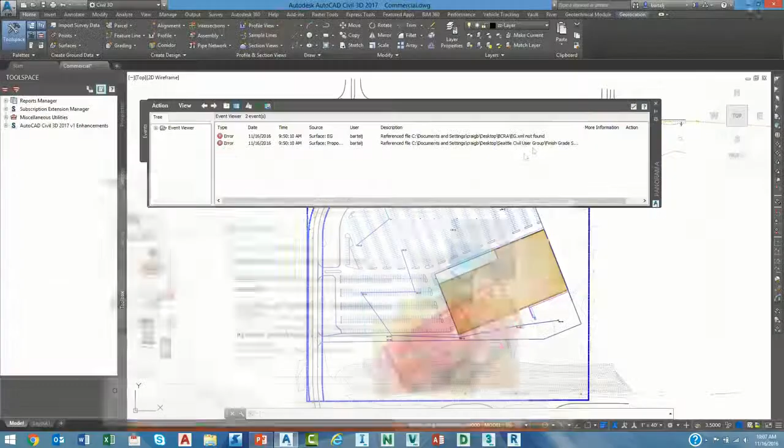I'm going to drop out of my PowerPoint here, and I'm in Civil 3D right now. The other point I'd bring up is that the bulk of the things we're showing are Civil 3D related, and they're not necessarily specific to 2017. So if you're on 2015, 16, 17, even if you're on 14, maybe even 2009, some of these things will still work as well.

If that situation were to change, we'll be sure to point that out. Now, in Civil 3D, we have a lot of tools to generate sheets, plan and profile cross-section sheets. There are times we might have a project like this where we'd like to tile it up into pieces such that we can do a grading plan sheet, tiling it up more in a grid pattern. It's not necessarily obvious, but that functionality does exist in Civil 3D.

We leverage a tool within Civil 3D called a map book. The way I'm going to do that, we'll open up a template so you can see that. So we'll open up my DWT, and I'm going to drill down into my folder here for grading sheets, and this is my template, just a standard sheet.

I've got a couple of viewports in here already, just so there's no magic involved. I'll take those out. I've got a primary viewport, and I've got another one here that'll reference as a key map, something that's going to show me where I am in the context of the entire project.

If we're in Civil 3D, we assign properties to a viewport called like section or profile. Because this is a different tool, we'll do it a little bit different. I'm going to bring up my map workspace - actually, a little icon up here on the top that'll let me do that quickly.

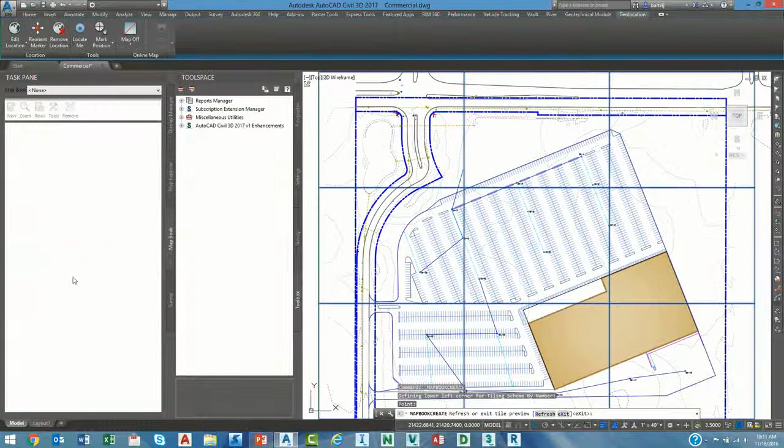I'd like my grading plan sheets to be 20 scale. We'll come down next to how we're going to lay them out. I'm going to pick the lower left corner - we'll start laying out sheets from right there. I don't want any overlap on the sheets, so I'm going to set that to 0. We'll start with 3 rows, 3 columns. I'm going to preview my tiles, and it automatically shows me how that's breaking it out.

I'm going to roll my wheel to back up a little bit. If we do that, I can still refresh my display. I can see I'm not currently getting everything, so we'll come back and we'll set that maybe to 3 by 4.

From there, we'll come down. I can name these sheets. We'll just start with 1 in the upper left corner, and number as we go through.

The last thing I'm going to do is define my key map, that area in the corner where I can see myself in context. I've got some layers within my drawing that outline the property, the building, things I would want to see in the key map. I'll select those layers, and those will be the only things that display in that viewport.

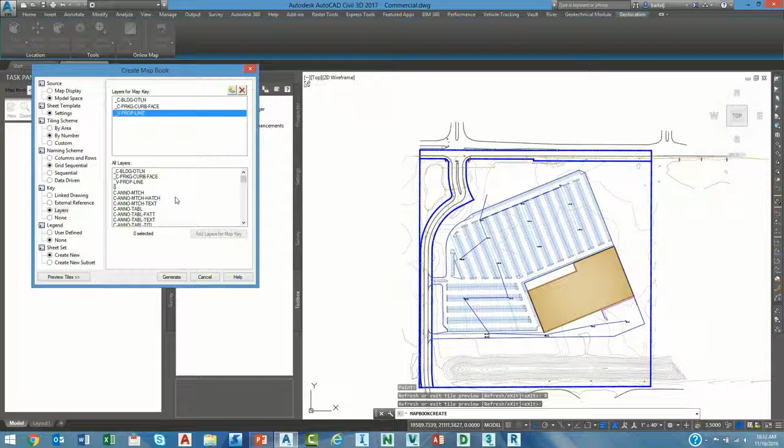And we'll go ahead and generate the map. Since I don't already have a sheet set, now we'll go ahead and create it. We'll throw that on my desktop for right now.

There are my sheets. If we come down to the bottom and I now click on grading, there's grading sheet number 1, number 2, number 3. You'll notice as I advance from sheet to sheet, it's maintaining where I am in the project, and I'm able to go from there.

So very quickly, I'm able to take a process that I would have done probably manually without a tool like this and break them out automatically. Okay, let's shift gears and look at the next item here.

Next thing I want to look at, we'll come down for my projects. We're going to look at associating files.

There are times when I have geometry in my model, maybe within my DWG file, that has information. I may have additional information about those objects someplace else, maybe in a database. The easiest way to think about this is with parcels, but it could be information collected in the field, blocks, trees, or a number of different things. The example I'm going to use here will go with parcels.

Parcels have a parcel index number as far as what number the parcel is. From there, you could go look at a table and pull up all the information about that parcel. Like I said, a lot of the time these things live in different places. I'd like to look at a way that I can bring those together.

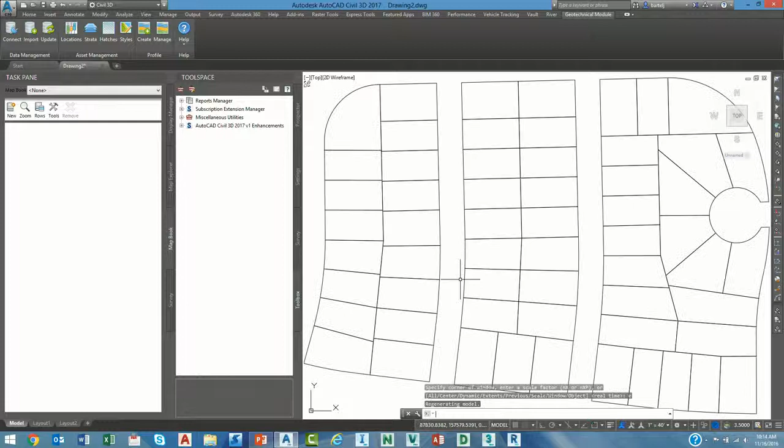We'll say okay, it inserted 59 of them. If we zoom extents, there's our information converted into just DWG polyline type entities. If I highlight this and go to properties, we see that there is the parcel index number, the attribute that was brought in. Now I'm starting to chew up a lot of real estate with these tools.

A couple things: with the tools, like on properties, I've already got set to auto hide to free up some real estate. I'm going to do that with my task pane as well. We'll set that to auto hide, and those now appear on the side.

If you're really tight for space, one other thing we can do is right click on this and convert all of those to icons only. If I convert them to icons now, I can just hover over the thing and I'd have all the tools down the side. So if you're not fortunate enough to have multiple monitors, I've seen 2, 3, 4, whatever. If you're dealing with one, it's a quick way that we can organize those.

So I've got that available to me. Let's go ahead, I'm going to bring out my task pane here. Many things in Civil 3D are drag and drop.

Now I said I've got maybe information someplace else, in a database, that has that parcel index number with additional information. Let's drill down and take a look at that. We'll go into my project. I've got my database, it's a Microsoft Access database.

I'm going to drag that in, drop it in my tool space, and it automatically attaches it for me. I'm going to go ahead and highlight that. And if we say View Table, here's all the information that I have. One of which is the parcel index number. So now I've got the data and I've got the geometry. I just need to find a way to hook the two together.

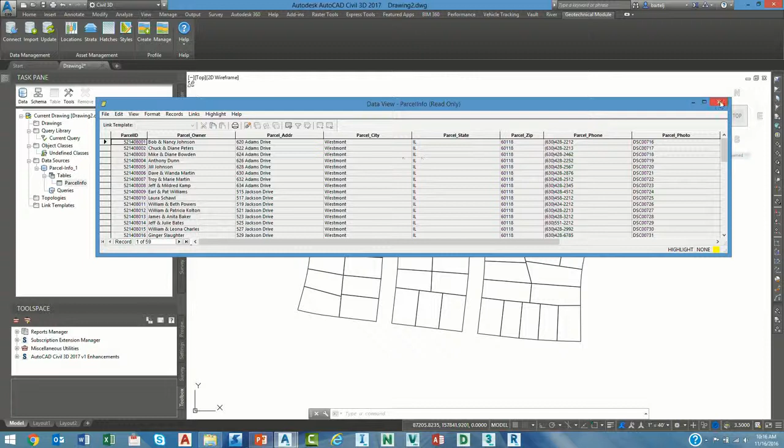The way that we'll do it, we create what's called a link template. I'm going to right click on that and we'll define it. It's actually pretty simple. We'll just tell it the two things we're going to do. I'm going to take the table. I'm going to build a new link template. We'll call it AU 2016. And we'll tie that to my key, which is my parcel index number. I've now got a hook into the database. I now need to hook it to my geometry, and I'll be able to go back and forth.

So with the link template, we'll say that we're going to generate the links. We have a number of ways that we can do this. We can link to blocks that have attributes. The attribute would be what we would tie into the table. We have text would be what we tie into the table. We could have an enclosed block, a block with a line around the outside of it, a polygon. It would do it to that or an enclosed text.

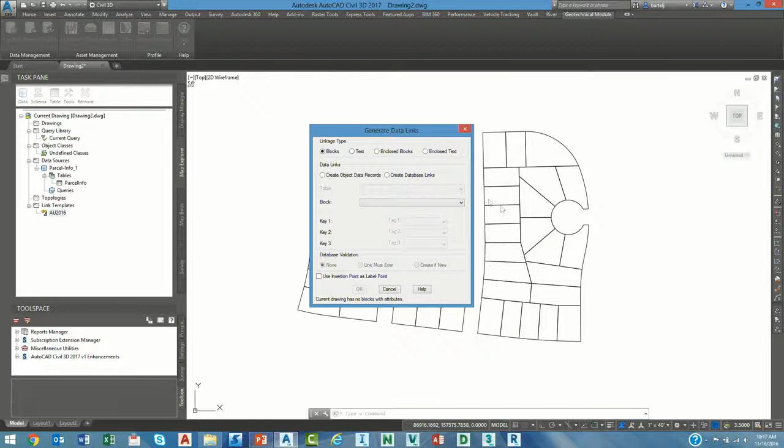Well, I've got geometry I want to tie it to. I don't have blocks or text to work with, so let's go ahead and create something. I brought this in and this attribute exists within my file. So I'd like to create what's called map annotation, which is a kind of block. I'm going to bring up my map tool space here. We're going to go to annotate, and I'm going to say define template. We'll give this a new template name. We'll just call it parcel index for my parcel index number.

I'm brought into an area now where I would build a block. What I need is a block that's going to read something from an attribute. And I really wish that they gave us that option here in the ribbon, but they did not. So it's kind of the super secret thing. How do you know? You just have to know. So the command that we're going to put in is MAPANNTEXT. I heard somebody say it, so somebody's been with me on that.

Select annotation, we'll press enter to enter the new annotation. The tag that we're going to use, we'll call it just pin. The value that we're going to tie that to, we're going to go out to my object data. We're going to drill down and we're going to grab the value that we pulled in from the shapefile. We'll say okay. What text font do we want? How tall do we want it to be? We'll say 5. Justification, we'll say that it's middle center. That's good. We'll say OK.

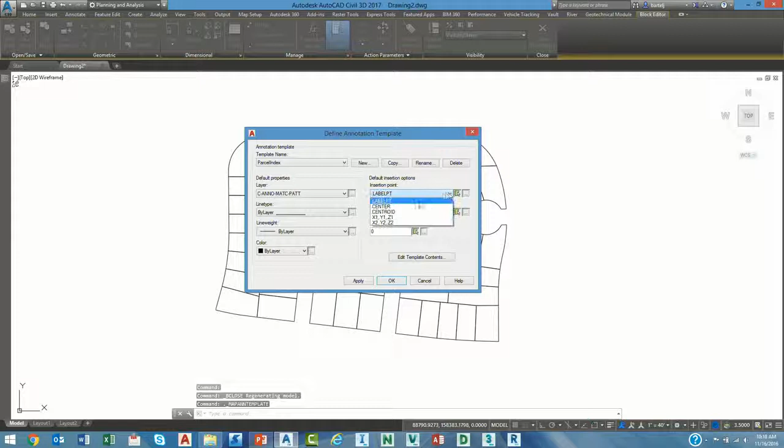I'm going to put that on the screen at 0, 0. And we'll zoom extents. There is my annotation, or my custom block now. We'll close the block editor. Save my changes. Notice it gives it a really cool name on the front of it, too. So we'll say Save Changes. When it gets placed in my objects, I can give it some additional information. By default, it should be placed at the centroid. Find the middle of that object and put it there. I can also alter the scale, maybe the layer, some other things like that.

We'll say OK. With that built, we'll come up and we'll say Insert. What would you like to insert? Well, we'll do the parcel numbers. What would I like to insert them on? We'll attach our objects. When I right-click, it's now read all the attribute values and it's placed it on the geometry. I've now created blocks inside my line work.

We'll do one last thing. The cool thing about this type of annotation is it's tied back to the attributes. So if we come back to properties and I were to change this to a 0, and we'll hit enter. It didn't update this guy, but there is a tool right here that I can say refresh the annotation. Parcel index, we'll say OK, and we'll do full annotation, and the values update.

All right, gives us a great way that I can either go to a database table or I can go to just attributes within the file, update my annotation. All right, now to make the link and wrap this guy up, I said I had to have enclosed blocks. Unfortunately, these are custom map blocks, so the tool's not going to allow me to do that just like a regular block.

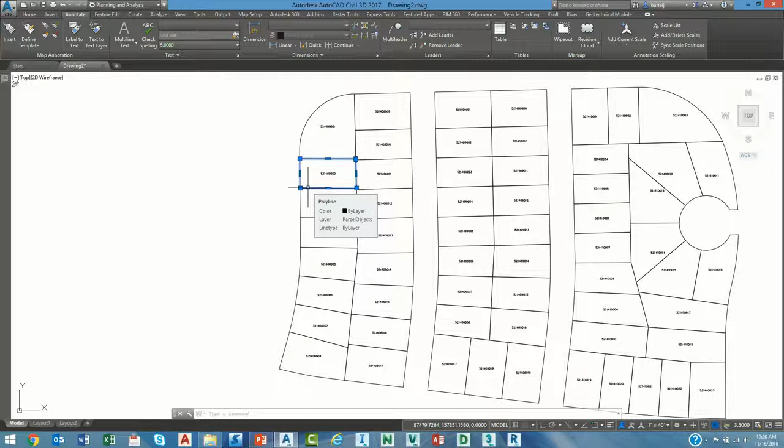So what I'm going to do is I need to turn these into text. All right? Turn them into text. I'm going to use a command called burst. What burst will allow me to do is explode my blocks that have attributes but maintain the attribute values. It doesn't convert them all to tags. So we'll say burst. Objects, I'm going to type in all. Grabs everybody. We hit enter. They've exploded them. Now they're individual pieces of text.

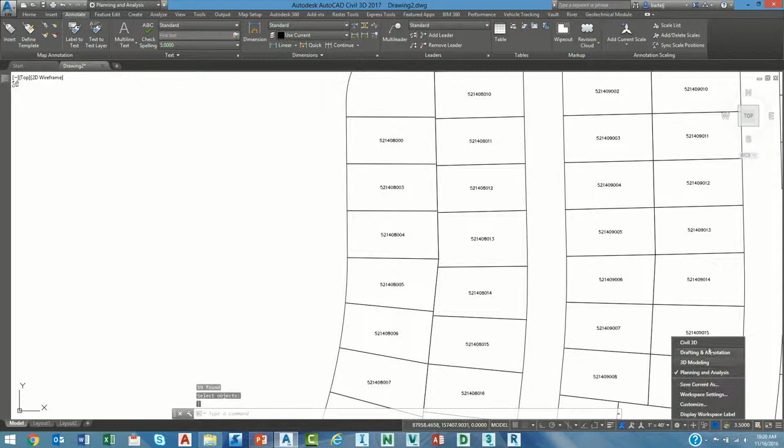All right? Let's do my linkage here. I'm going to flip back to my Civil 3D workspace. We're going to come back up. I've closed my tool space here. We'll bring this guy back up. And we're going to say generate links. We're going to say enclosed text. All right, it already knows the hook into the database table. It knows that it's going to look for text in my file. It's going to fan out from around that till it finds the line work, and I'm ready to go.

So we'll say create database links, and OK. Objects, we'll say all. It's made 59 links. How do we know that it worked? If I bring up my parcel index information now and I view the table, I'll toggle some values to auto highlight, auto zoom, and select. And now, when I pick in my database, I've successfully tied that to information within my file.

All right? Now, last thing that we're going to do to look at this is cool. I've got information in this database. It's an external database. Other people could be modifying it as well. I've got some cool stuff in here with respect to like a photo for that particular object, or a legal description, or any other information I'd like to tie in the database. No reason to have it all tied up in the DWG file if I can reference it from someplace else. A lot of people have wanted to select objects within a file and see a photograph of the head wall or something that was created in the field, or the tree, or the specific culvert.

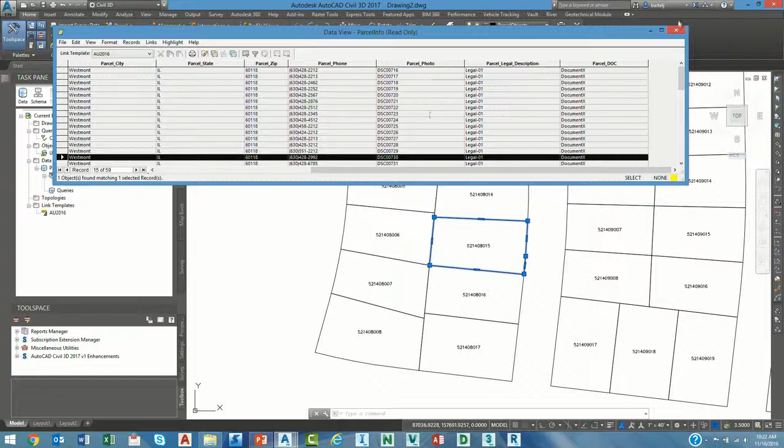Let's do this. Two commands to do that. I'm going to say ADE, def for define, and doc view. We'll just give it a name. We'll call it photo. I'm going to drill down expression. Where does that information live? Well, if I go to my link template and I go down, there is the value that's in the database for the photo. Directory. Browse, where do I have those guys? I've got those guys in my GIS folder. Oops. I've got those in my photos folder. We'll say OK. They've got a JPG extension.

And then all I need to do is tell my system what file I'd like to view that with. So I'm going to go to Internet Explorer. I'm going to right-click on that. I'm going to go to Properties, and I'm just going to copy that target. That's the program I want to use. That's how it finds it, so that's how I want my Civil 3D to find it. So I'm going to paste that in here. I'll add that to my list, and I'm ready to go.

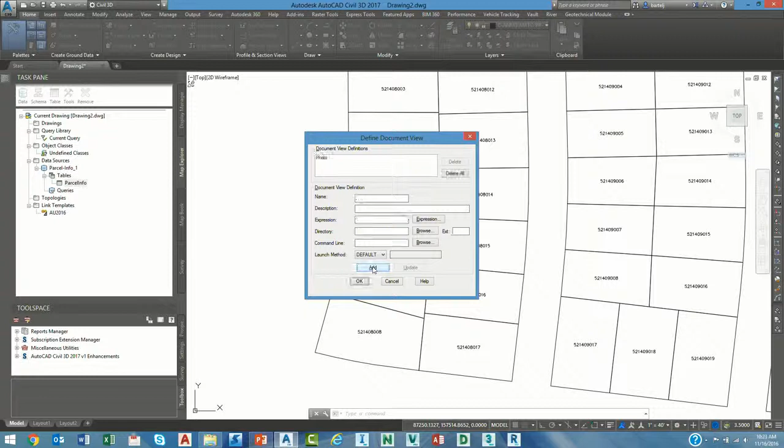All right, to make it work, I want to see the photo. I'm going to type in ADE doc view, select object. I touch this guy, that's what that guy's house looks like. We'll right click, doc view, touch that, that's what that one looks like. If I define multiple ones, I would get a whole list of things I'd like to pull. Like I said, the great thing about this is instead of embedding everything in the drawing, I can reference it from someplace else. Other people can edit it. If they make changes to the database, I have access to it here. All right?

Okay. Let's shift gears. Next thing I want to take a look at. When we're in a drawing file, there's a lot of information we'd maybe like to have access to when we're outside the drawing file. So for example, if we come back into this guy, I'm going to go to Drawing Properties, and I'm going to open up my earthwork file here.

All right. Some people have seen this, some may not. It was actually kind of new to me when I saw it the other day. The quick way to generate earthwork, you know, we've got the volume dashboard and all that now. We can access what I think was the old-fashioned way of doing it.

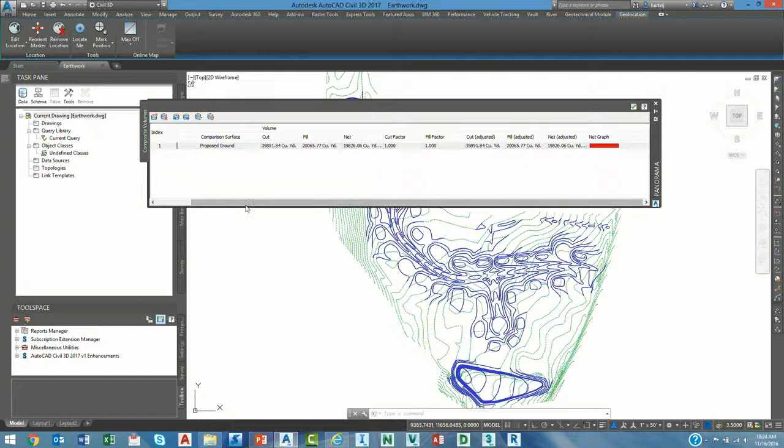If we type in report, surface volume, all right, I just tell it that I want my existing compared to proposed, and I'm done. I've got my earthwork. I don't need to go any further than that. So if I need something quick, I can do it that way. All right, because it's a file that I can do earthwork, I thought I'd throw that in.

The information I want to get access to. If we come down and look at drawing utilities, there's an option for drawing properties. If we go into properties, I can come down to custom, and I can assign values that will live with the file. The cool thing about these values is I can start to put things in it like projection, or the client name, or the project number.

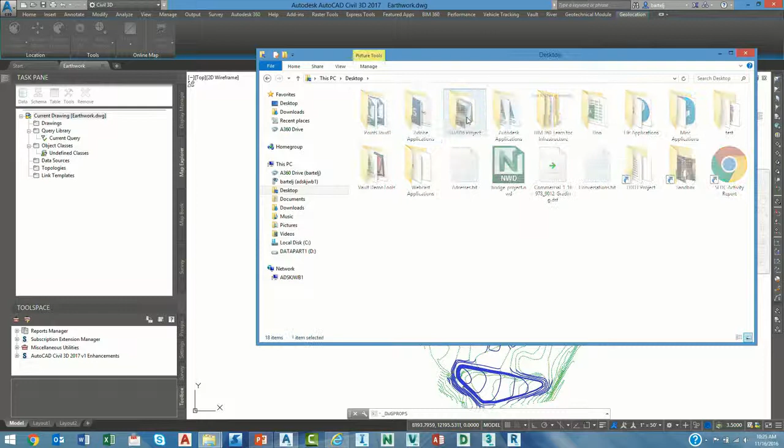All right, and the great part about it is if I navigate out into my Windows Explorer, and we go grab a file, we'll take a look at properties just by highlighting it, look at custom, all right, and I would be able to see those from the outside. So anybody that's ever wondered, well, what's the projection on this file? What's the project name, project number? Now I can just highlight the file, I can right click, and I can see it.

All right, I can't change it from the outside, but I have the ability that I can see it, which is nice. So how we would take and create it, I'm going to say add. We'll say project number. I can give it a value. We'll say OK, and I'll start adding that to the list.

All right. Now that's good for this file, but how would I add that to a bunch of files? And I don't want somebody to have to keep reinventing the wheel. There's a command that will allow us to do that. That's called PROPULATE. P-R-O-P-ulate. So let's take a quick look at this. We'll say propulate.

I can attach a template, I can edit a template, I can list what's there, I can remove it. Let's take and set an active template. I've got one in my folder already that maybe is the default for this project. We'll go ahead and say open. I'm going to use that now that it's attached to update what's in my file. We'll update either the current drawing or other files.

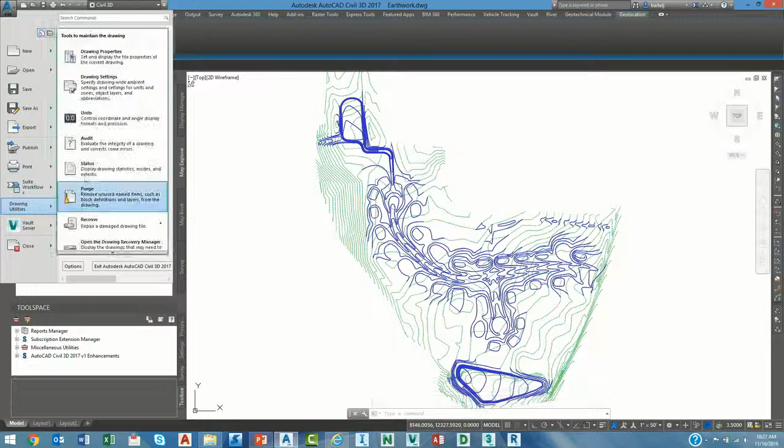If I look at the current drawing, now if I come down and look at drawing utilities, and we look at properties, and we look at custom, I've got all the values ready to go that people can start filling those out. So I can have a template set up for a particular project, and then, like I said, if people want to drill in, they're able to find that. If I'd like to create other ones, that same command, I could open it up, save it for another project, and then go from there.

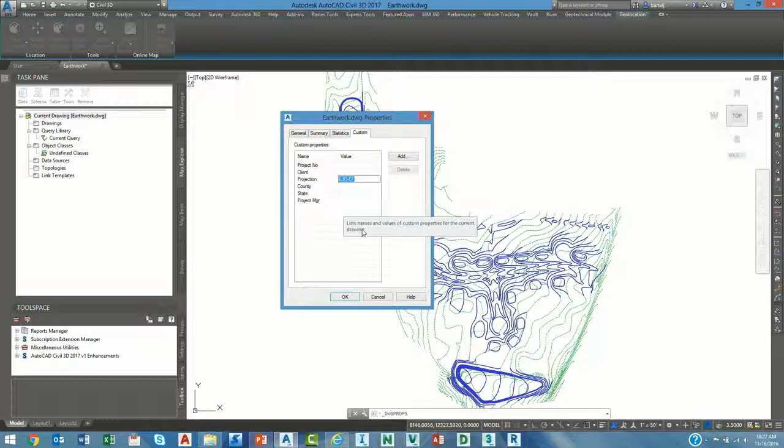All right? Last thing that I would show, I would really like to be able to search on these values, but I can't. It's metadata for the drawing, but the custom things we can't search for, but I can search for other values. So for example, this projection, I'm going to copy that to my clipboard. I'm going to come back and look at summary, and I'm going to put that in here for keywords. And we'll say OK. And I'm going to go ahead and close this file.

All right? So now I've got one file that has Illinois State Plane, East Zone, whatever value I put in for those keywords. The way that I would find that, if I get in the habit of putting keywords into those areas, I'm going to launch Design Center. Anybody use Design Center? All right. So I'm going to type ADC to get into Design Center. There is a tool here at the top for search.

And what I can do is I can come down and I want to search for IL asterisk. And like I said, it would be great if they had the custom stuff at the bottom, but we don't. But I do have the other ones. We'll say keywords.

I'll tell it the folder that I'm going to go to, which is where I've got my 2016 files. We'll say search now. It goes through and searches for all of that information, and it finds my earthwork drawing. All right? So if you get in the habit, the custom, mode of operation in your office to add values to these things, then you can search and find all the stuff that has to do with a particular client, all the stuff that has a particular projection.

If we select a file, we can use drawing properties to access other information. So the cool thing is we don't need to get into the file to actually be able to see it. All right. We're going to shift gears. Let's go into the next one here. We'll say open. I want to look at a site data table.

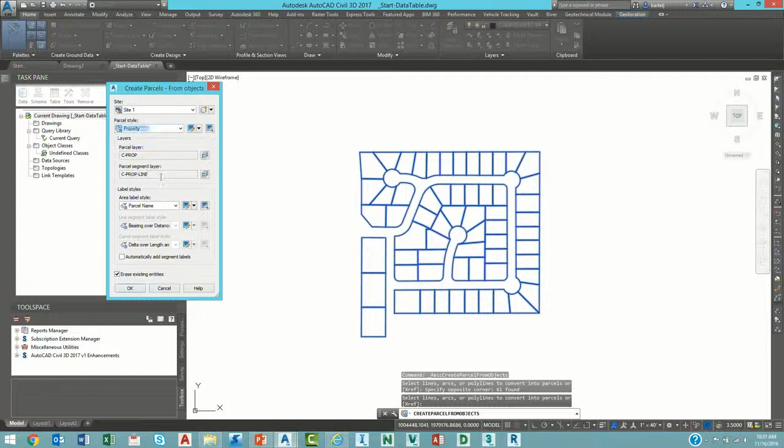I'm going to turn these into Civil 3D parcels. I probably want to clean it up, but for right now, I just want some parcels to work with. So we'll just create parcels from objects. I'm going to window these guys. We'll right-click. I'm going to put them on the site, and I'm going to associate a parcel style. The style is the key that will use the intelligence within Excel to put these things into different categories and make a more intelligent table. So I'm going to call these single family. We'll erase the existing entities, and I've got all my single family lots.

Now, I would do the same thing and define parcels for things like open space, detention area, the overall property. Because I don't have that in here right now, we'll just make a couple things to work with. Let's say this was the overarching property for everything that's there. We'll make another rectangle. Maybe this area is going to be my open space. I'll make one more that's going to be my detention area. I'm just going with rough things now to have parcels to work with.

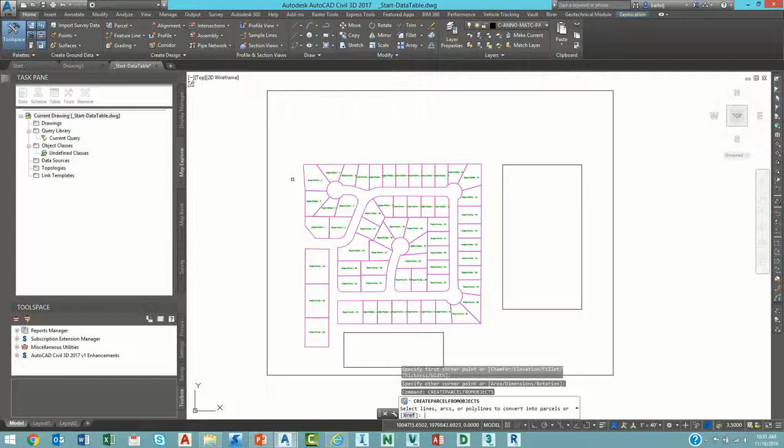Let's define these. I'm going to hit the up arrow to go back to my create parcels from objects. We'll select this guy. This is my open space. I've got a style already set in here for open space. These are just the defaults that we get out of the box. Create from objects, this guy. This one is going to be detention. I don't have one for detention, so I'm just going to use basic for right now, just to have something different. And the last one, this is my overarching boundary for the entire project.

We'll build that one. I am going to put this on a different site so that it doesn't conflict with my other parcels and try to start subdividing it, so we'll just call that project for right now. And the style that we'll associate with that, we'll call it property. We'll say OK. With that done, we'll roll up my task pane here, and my properties.

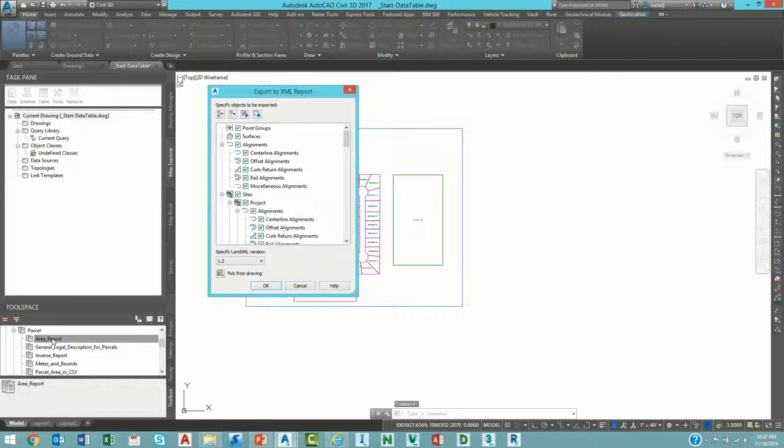We'll come down to Reports Manager, under Parcel, and I'm going to double-click to create an area report. I want to export this information so that I can use it in Excel. We're going to export it. We'll leave it to default Civil Report. We'll say Save.

Generates my report, pops up Excel. This is what we're used to seeing. Or we could have dumped that into Civil 3D. We would have seen the same thing.

I want to do a little bit more of that, so I'm going to highlight all the values that it gave us. We'll come down to the end, and I'm going to copy that. What I've created is just a simple site data table.

We'll pull this up. We'll say desktop, 2016, my project, and we'll bring up my template. All I have to do is click in the box here and paste.

Those values come in, and it automatically populates my site data table. I'll give you a copy of this, I'll post it, and you'll be able to download that if you'd like to experiment with it. I've got it for entertainment purposes only.

If somebody finds a math error or whatever, I also set it up so that if you wanted to tweak it—maybe you don't call your lots single family, maybe you call them based on zoning or something like that—you can change the values in here and it will update the formulas.

I've also created some things in here with respect to conditional formatting. So if my limit is I need at least a minimum 12,000 square foot lot, it'll start coloring those items red to identify where I've got problems.

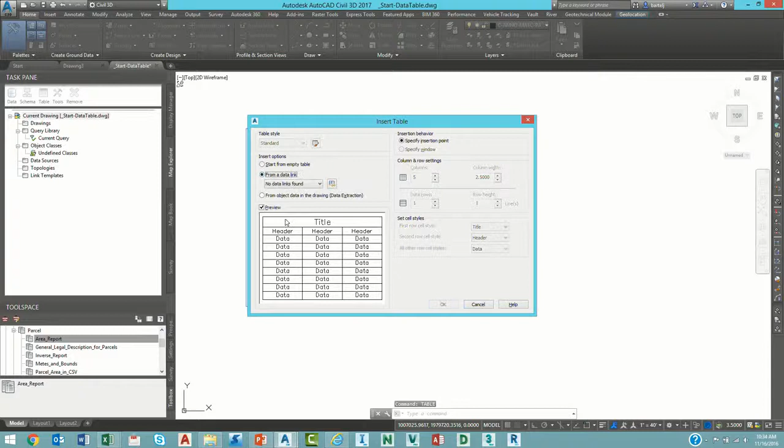Now I want to bring this back into Civil 3D and be able to use that. Very cool—I can use the command Table. We're going to come out, create a data link, and create a new Excel data link. We'll call this Site Info.

We're going to browse for my file. You know what, let's save that file. We'll come back to Civil here, browse for that in my folder—site data table. The template will grab that guy.

It wants to know what we want to link to. I want to link to a range. If we look in Excel, it's from L1 to O11 is what we're looking for. So we'll put that in here, L1 to O11. We'll click on OK.

Sometimes it'll give you the preview, sometimes it'll give an excuse that it's too large, but if you get it, that's great. We'll go ahead and bring that in, say that we'll create that, and I'm going to drop it right here.

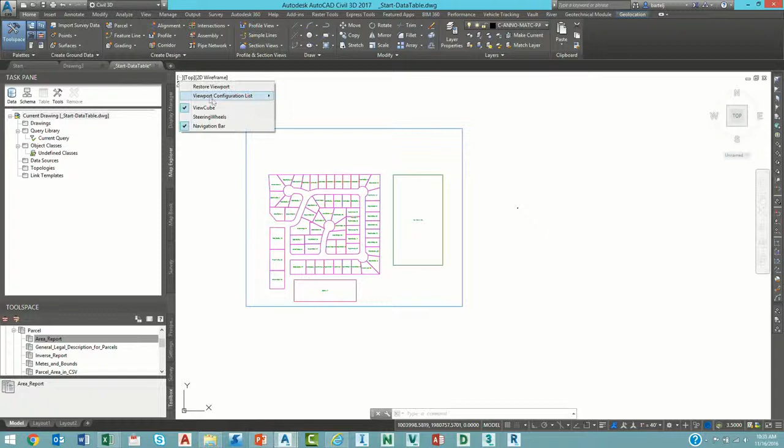I'd like to be able to see that because that's kind of microscopic right now. So I'm going to come over here up at the top. Anybody who's used viewports before, I can click on the viewports control right here in the window. Let's do the configuration—we'll do two vertical and zoom up to take a quick look at this guy.

There's my table—there's the information that we pulled. And the great part about this is if we come in and make changes to any of this data, export that back out, paste it into Excel, I'll get a balloon notification in the bottom that it's been updated. I'll refresh it, and my table will update to reflect that.

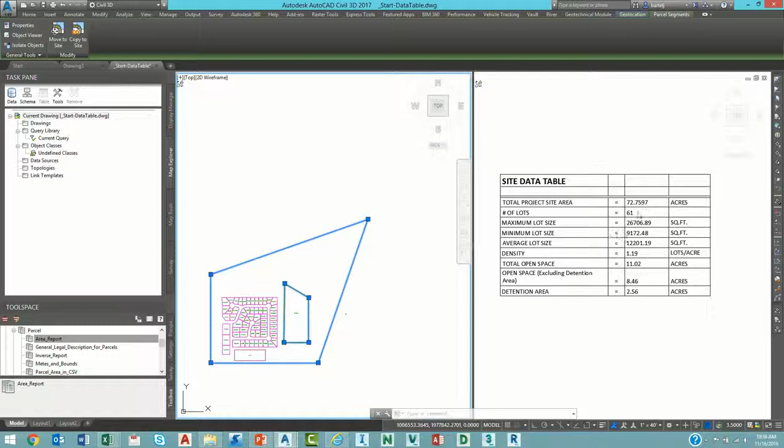So linking to Excel, we can do that for a lot of different things—we can generate those tables. I can come in here and tweak formatting directly within this environment, either eliminate lines or center justify, make it look exactly like I'd like it to.

Let's take a look at Google Earth here for a moment.

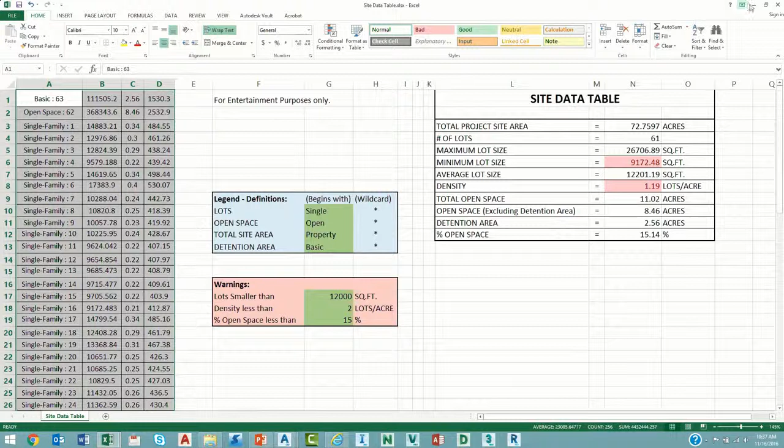Anytime we work on projects, it's always nice to know what other projects we've done in the same vicinity. If anybody's like our office, we used to keep all of that on paper tax maps with Post-it notes and all types of things to determine that—like, hey, I think we did a job close by there, what job number was it? I don't know, then we'd spend more time than we should trying to figure that out.

There's a cool way that we can use Google Earth to do a lot of the heavy lifting for us. To do that, because we've got the ability to export geometry out of Civil 3D to a KMZ file—what I mean by this, I'm going to go out to Google Earth here for a moment.

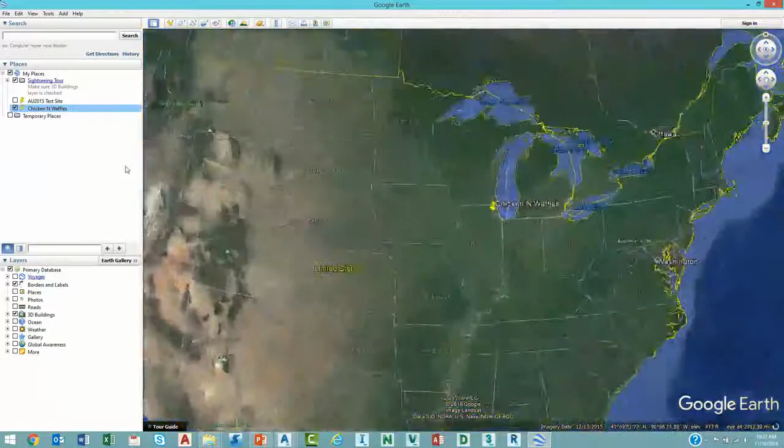We'll fire up Google Earth. Jeff and I did a presentation yesterday on a fictitious project here—our chicken and waffles restaurant. So let's say we were going to go to that particular site, and we want to see other things that maybe we've worked on around it. That's our utopia, if you will.

I'm going to back up. I knew maybe I did something out west, but I don't see it. It would be great if those things would light up on the map here. Well, I can do that.

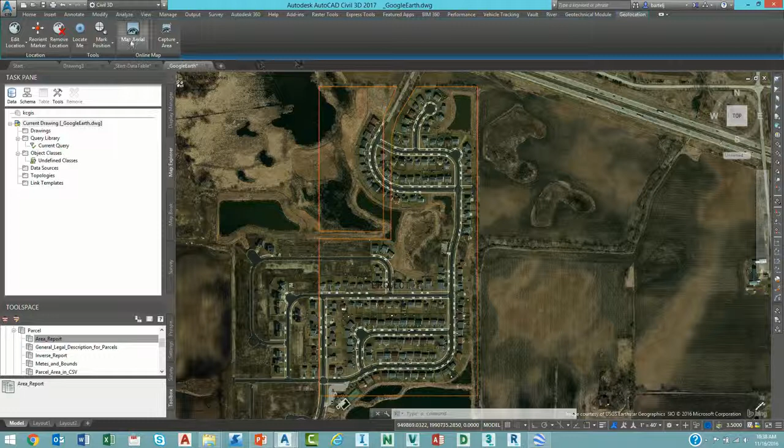The way I'm going to do it is I'm in Civil 3D. I've got a job here that I've finished, with some parcel information around that particular job. Let's go to geolocation, I'm going to turn off the map. The only thing I need is some boundary of what I'd like to reflect, and you can put information on it. For most people, project name is enough—then they can go into their own internal system and look up what they need. But if you'd like, you could add additional text and use that as well.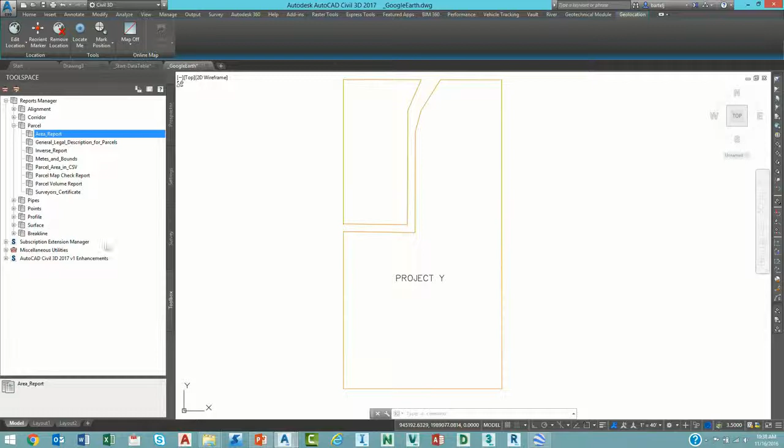To make this work, we're going to close my task pane. I'm going to come down to my utilities here under the toolbox, and double click on Export to KML. I'm going to give this a name—we'll call it Project Y. Next, objects, we'll say select.

I'm going to grab the polylines that I have as well as the text. I'm going to tell the system I'd like to export text, and also export object information. If you had a horizontal alignment or something like that in there, you'd actually be able to drill down and see some of the civil data as well. We'll just keep it simple for right now.

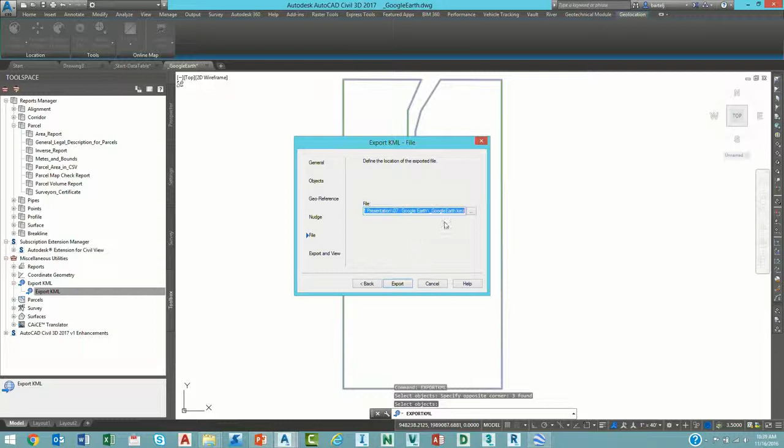Georeference—it's already on a coordinate system, so it'll project itself nicely in Earth. I'll drape those objects on the ground and export that out to a file. We'll just call it the default there. We'll say export, we'll hit view.

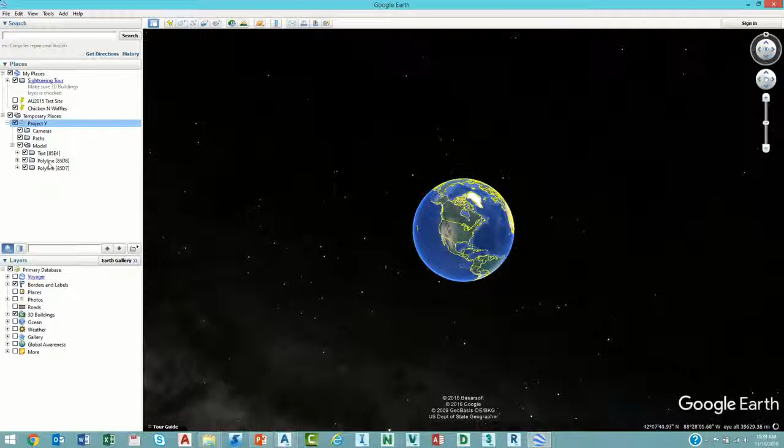And if we look over in my list here, now here is my Project Y. Here's my polyline. So if I click on that, we zoom very quickly in, and we see now that that project exists.

So once again, if we were to go back to our chicken and waffles thing, I would see that I had a job here. If I had done other jobs, I would see those pop up as well. Those are currently sitting in my temporary places, so I would need to move them up to my places to be able to see it beyond that.

Let me throw out my last thing on that. Hey, I could have a whole bunch of these. I want other people to have access to them on their machine as well. How would I migrate this from machine to machine? Very, very easy way to do that.

I can highlight these, and they've got a tool in here for email. Whatever level I put it at as far as the folder, I could go all the way up to temporary places, email that, type in an email name, and it would send them a file. Once they get the file, I open that in their Earth, and it would give them all of those different values.

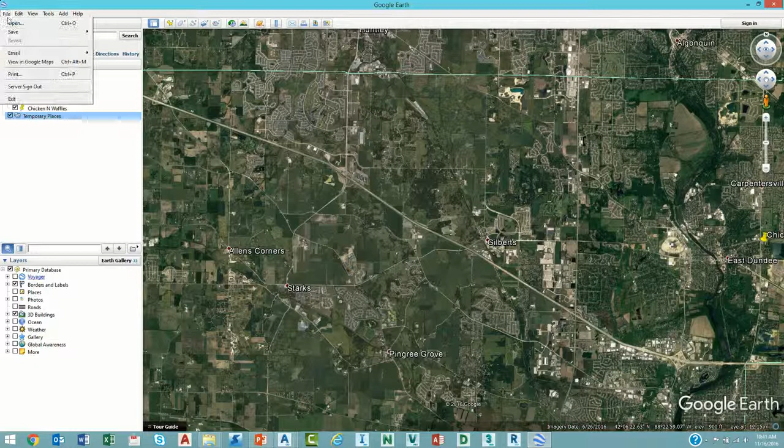So let's do this. I'm going to remove this, so that guy's gone. And I'm going to come up here to the top, and we're going to say File, Open. Here's my export—I've already emailed it, saved it on my machine. I'm going to grab my custom objects here. We'll go ahead and say Open.

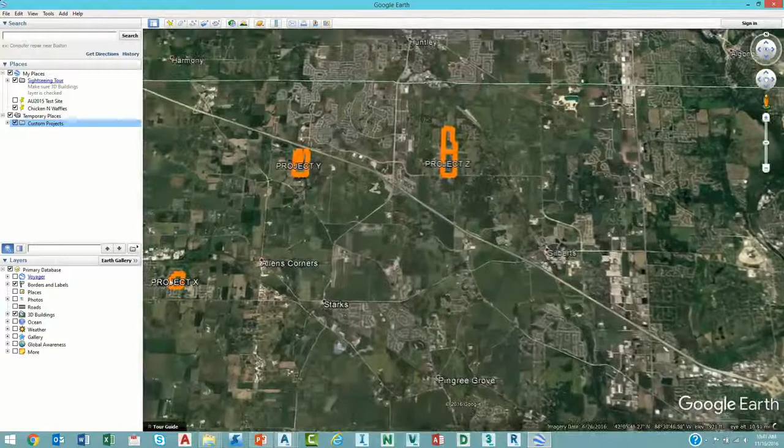It automatically brings those in and highlights those on my machine. Those are my custom projects, and I could say that I'd like to migrate those up to my My Places, so I would have access to those.

Last thing I'll show you on this—if we look at Project Y, this gives me information. Like I said, most people, that's really all the information they need. But if you'd like to add additional information to this, we can tie and link to this data as well, maybe to a network drive, maybe I've got additional information I'd like to give folks access to.

The way I would do that, same thing—we'll add a place mark. Those are things we can export as well. We'll give that a name. I'll call that Project Y.

I'm going to say Add Link, and then I'm going to give it the link to where it is on my machine. It doesn't have to be a URL out to a website. Right now I've got these in a folder called C:\test.

This is the cool thing: you have to put the backslash in the wrong way. I don't know, you just have to know. So we'll say C:, wrong slash, test, we'll go the other way with that one, and I've got project y.txt as the file that I have in there. We'll go ahead and click OK.

It builds my little HTML code for that. I can give it a name. We'll just call this project info.

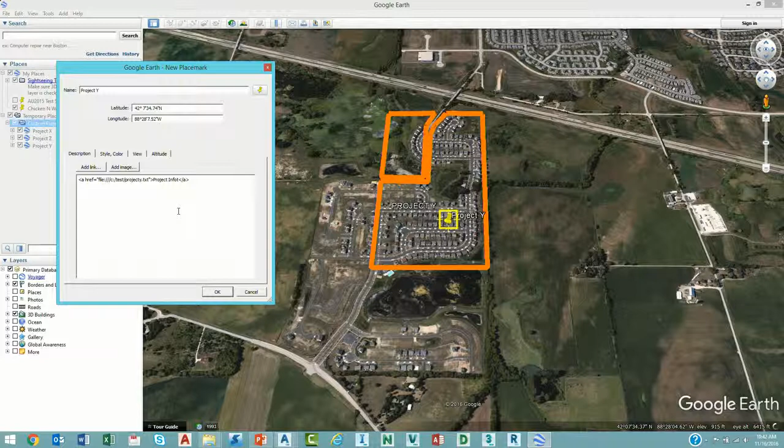We'll say OK. So if I incorporate these into what I export and what I move around, I can now highlight on that. I've got my link here, and when I click, it'll automatically bring up and read from that text file. So I can start to pull information like the project name, a description, the address, who the contractor was, surveyor, benchmark status, whatever the case may be.

So now, instead of using sticky notes and colored pencils or markers on a tax map, I've created a tool that I'm able to use to gather that information more quickly.

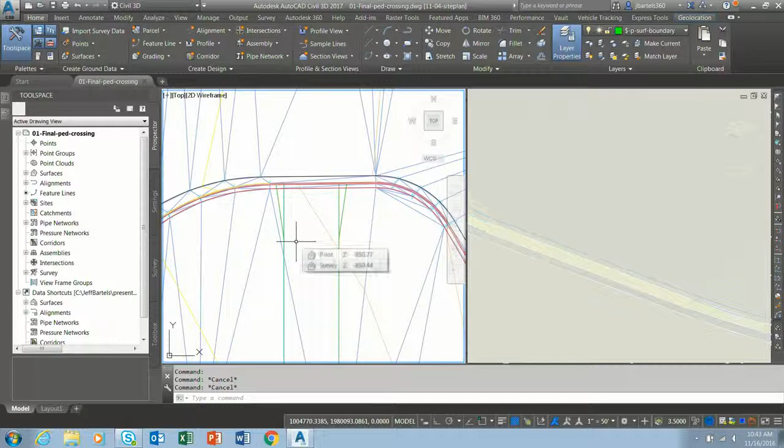What we're going to look at here is some site grading. I have got my screen split currently. I've got a drawing here that represents a site plan for a small site. I'm going to select the surface here for a minute, and we'll go to Object Viewer, just to show you that surface has been modeled.

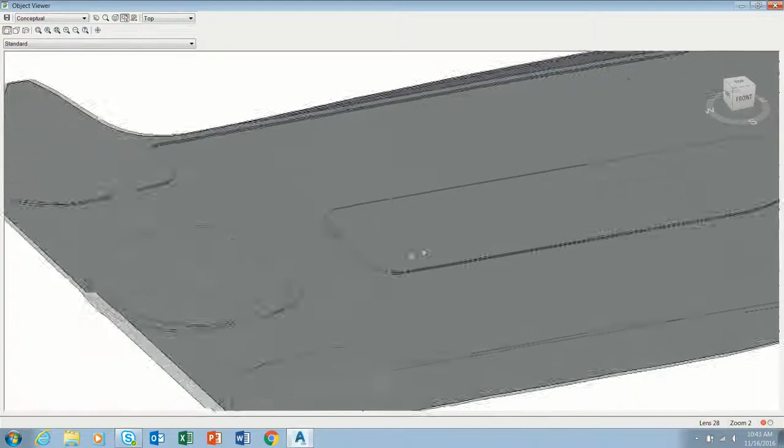Part of doing the site grading is creating the lowerings for the sidewalk, and historically there isn't a nice button to do that. So I wanted to show you a workflow. A lot of people have different techniques and strategies for doing this, so I thought I'd show you my strategy. This parking lot was built using feature lines.

Okay, I've got one more lowering here of the sidewalk to do. We'll just take a quick tour. I've got a surface called P-lot, and here are my feature lines. If I select these, you can see this view on the right is the same area, just from a 3D perspective. I've got a feature line that represents my back of curb, face of curb, flow line of gutter, and my edge of pavement.

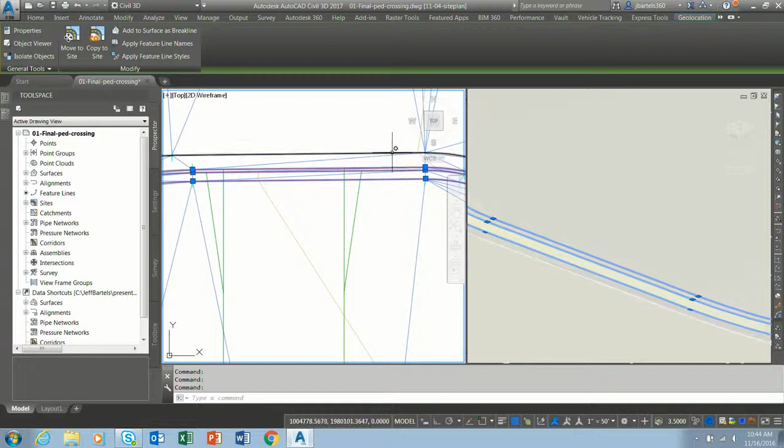Let me select one of these for a second and come over to properties. I just want to show you all of them are in the same site, called P-lot curb gutter.

So what I'd like to do is create my sidewalk lowerings now. I've got some geometry here, just from the initial conceptual plan. These are polylines, and they're at no elevation, just 0 right now. So we're going to start with these.

I'm going to join - I'll just grab the little flange there in the straight segment, and I'll join those together. I've got two nice polylines now to represent the edge of my sidewalk.

I will convert these into feature lines. I'll say create feature lines from objects, and I'm going to call these P-walk south. Since I'm going to have more than one here, we'll bring up the name template and insert a counter. Then I'm going to erase the existing entities.

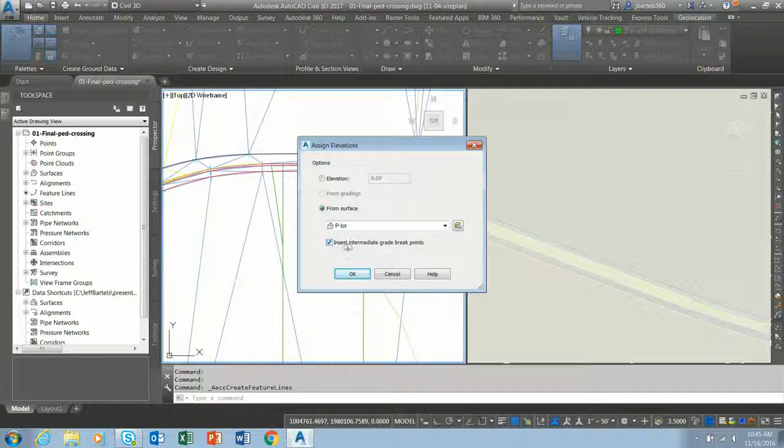We'll assign elevations. I'd like to pull the elevations from that proposed lot surface, just to project these up because the proposed lot surface is good. I'd also like to insert intermediate grade break points. When I click OK, you can see those feature lines were projected up such that they were like spray painted on the ground.

So I'm going to use these now to lock those edges of my surface so I can push that end piece down, all right?

Let me show you one more thing here I didn't touch on. The straight segment - the area that crosses the curb - you can see that geometry terminates here at the lowest edge, that's what I'm going down to. And the flange terminates at the top front of curb, which is the very highest point right before we drop off.

So I've got these two feature lines now. I am going to put these in the same site as the others, P-lot curb gutter. By doing that, it's going to create some calculated points for me. Just as an example, if I select this feature line and go to the elevation editor, you can see it's created a calculated point. It's saying the elevation at this intersection is being driven by that other feature line. And that's consistent with both sides.

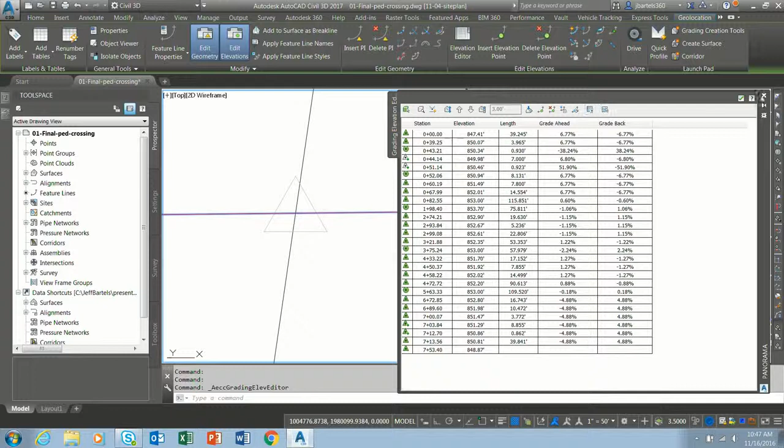Let's do one more thing. Now that I've put it in that site, I am going to add these as break lines to my P-lot surface. So now it's triangulating to those edges as well. So the surface really hasn't changed. It's maybe triangulating to a couple more points along that edge, but I've essentially locked those edges down.

Now I will take my lowerings. We'll say feature line, create feature line from objects. I will select both of these, and we'll call these P, walk, south, lowering. And since I have more than one here, I'll use the template, and insert a counter. Going to keep the same style. This will be the walk style.

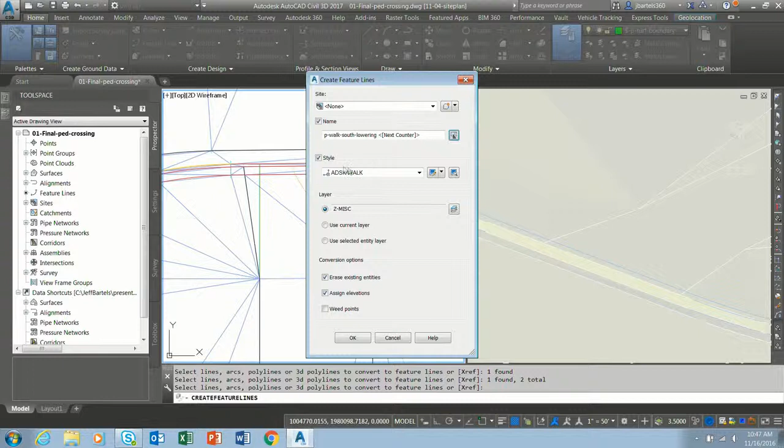We'll erase the entities, assign elevations. I'm going to pull the elevations from that same P-lot surface, except this time I don't want to insert any intermediate grade break points. Let me click OK. By doing that, it's only going to sample an elevation at the ends, which is perfect because this end is at the low side, you can see it right there, and this end is up here at the high side. That's consistent for both.

Let me select both of these feature lines now, and I will add these to that same site, P-lot curb gutter, and I'll click OK. And that's essentially it. I can now take and rebuild my surface.

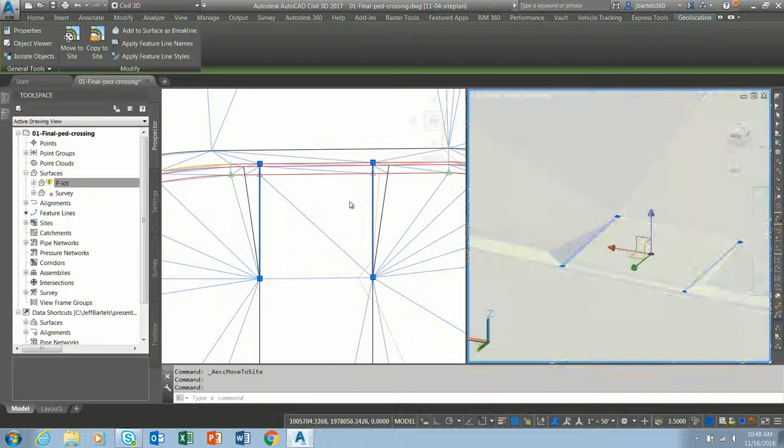And you can see how the lowering came down there. Now, just to show you a little bit what's going on, I'm going to take this surface and I will hide it. Let me change my style here to no display.

So there's my feature lines. I'm going to select all of these. And just for a second, let's move them into a different site. I'm just going to move them into the none site. And when I click OK, watch what happens to the curb. Curb pops up. There's no interaction anymore. They're not in the same site, so they don't even know that they exist.

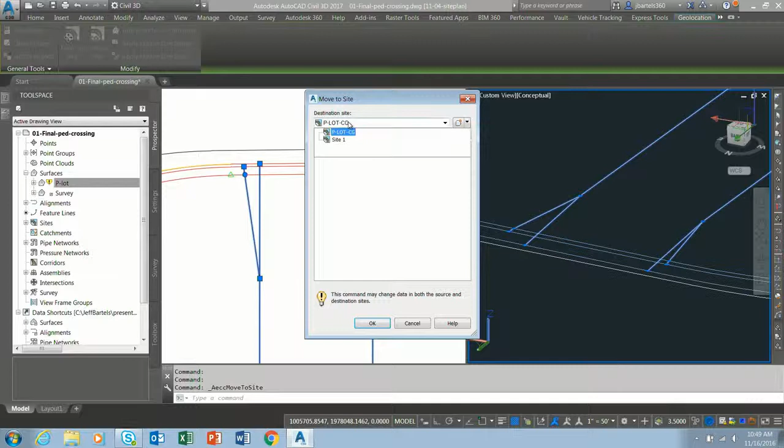Once again, still selected. We'll go to Move to Site. I'm going to move these back into the P-lot curb and gutter. And when I click OK, now, oh, hey, they're in the same site. They interact. Therefore, the sidewalk is going to be pushing the curb and gutter down.

Now, the way this works, if the feature lines have the exact same style, whichever one's edited last wins. In this case, they've got different styles. So you may be wondering, is there any way I can essentially establish a hierarchy? And the answer is yes, you can.

If I come over here to my site, I'm going to open up Sites, and I go to P-lot curb gutter. If I expand that out, you can see there's a feature lines category. I'm going to right-click and choose Properties. And in here, there's an Options tab where I can determine who's more important than anybody else. And right now, the walk is more important than my curb gutter.

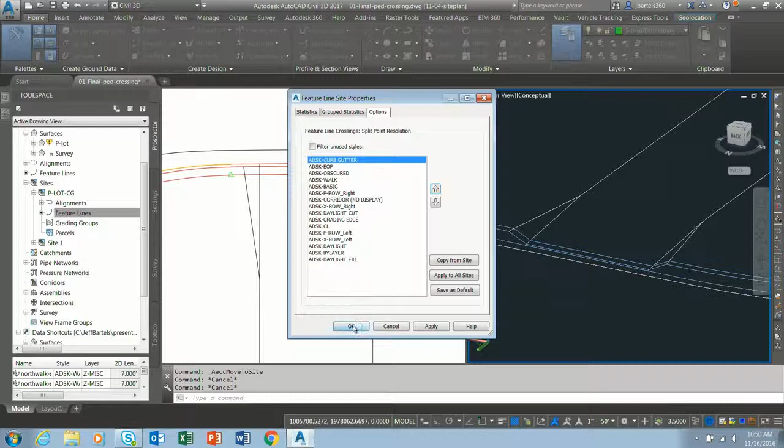If I take the curb gutter, for instance, and I make him more important, push that to the top and click OK, watch what happens. Has anybody seen that before? No? All right. Well, today's the day.

Today's the day. Now it's a little bit easier now. I mean, now I can say, curb gutter, okay, that's priority low. Sidewalk, that's going to drive everything. It makes it a little bit easier to make adjustments here.

Let me go to Properties, and I'll take the walk here. We'll shove the walk to the top. He's the most important. Let me click OK, and you can see that pops back down again. All right, that's the trick. Interaction in the same site, and then which one has priority.

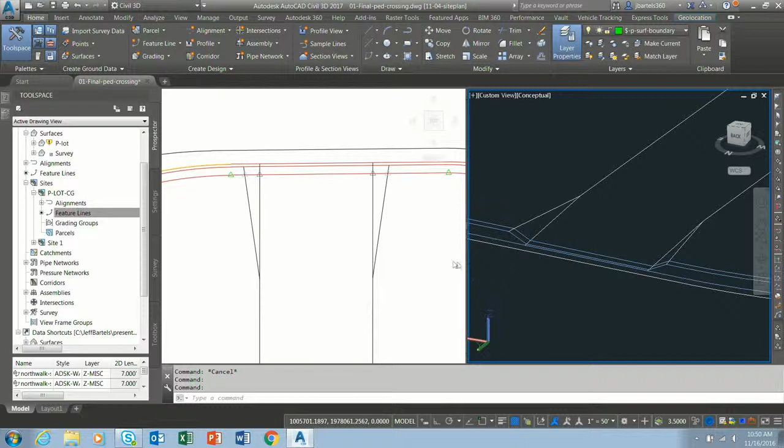Fantastic. Let me jump out of this.

And I'm going to open another drawing here. Let's talk for a second about property set data. Civil 3D does a nice job holding data on objects, so long as the data was created by Civil 3D. If you want to add some of your own data to the Civil 3D objects, that can be a bit of a challenge. And with a BIM workflow, you know, the I means information. That's what we want. We want to be able to put our own information on these objects.

So, Civil 3D is built on top of AutoCAD. It's built on top of MAP. It's also built on top of AutoCAD Architecture. There's a lot of AutoCAD Architecture code in here. It's not exposed in the ribbon, but if you know what the commands are, you can get to them. So something that the development team has been experimenting with lately is leveraging one of those AutoCAD Architecture tools. It's called a property set. It gives you the ability to add data to any object in your drawing.

How many Civil 3D 2017 people do we have here? Okay, we've got a few. How many 2016? Okay, this works in 16 or 17. In 17, we've got a button for it now. If I go to the Manage tab, I can say Define Property Sets. And when I click that, you can see it just runs this command called PropertySetDefine. If you're in 16, you just got to type that out, PropertySetDefine.

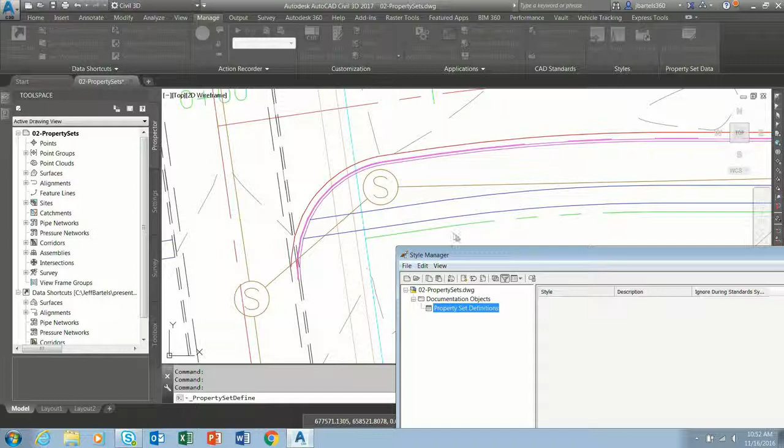So let's say I've got some sanitary structures here. Let's say that this was collected in the field. I'm building a model that represents my existing utilities. And I'd like to add some additional information on here, maybe the owner, maybe the condition, things historically we just can't get with a pipe network. So I do my PropertySetDefine, and then I want to create a new property set definition. So I'll just right click here and say new, and I'll call this san data. So that's the name of my table. That's the table that's going to hold the attribution.

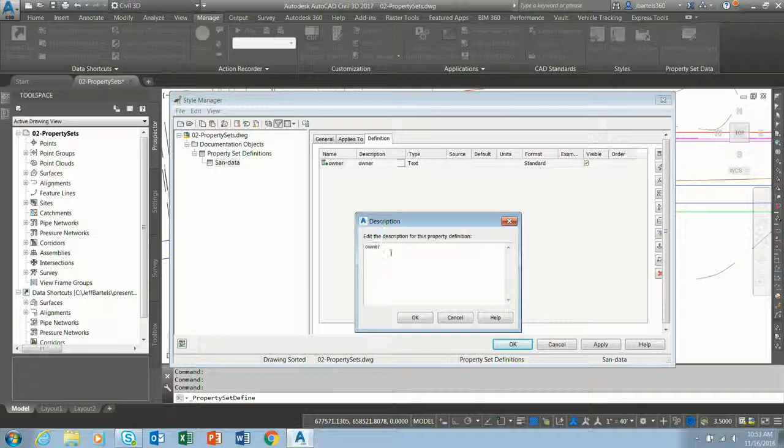Once I create the table, I can then use these tabs to configure how that's going to interact with my drawing. General tab is where I give it a name and a description. Definition, this is where I can create my attributes. To create one, I'll just click this icon in the upper right corner, and I'm going to call this owner. I'll click OK. So there's my attribute owner. I can also give this a description. Owner's pretty descriptive. I could say owner of utility.

What type of attribute is that? I've got integer, real, text, true/false. There's also some auto increment stuff in here. I'm going to choose text. It's just a text string. And then for right now, we'll assign a default value. I'm just going to use the word owner. This way, I know that's obviously wrong, and that shows me what it's meant to be. So if somebody chooses not to answer it, or it's not entered, it'll just say owner.

Let's create one more attribute. I'll just click that button again, and we'll call this condition. And for description, we'll just go with condition. That's going to be a text string. Default here, we'll just say description. So that'll be the value it has if it's not assigned a value. All right, so I've made my table, I've defined my attributes. You can make as many as you want.

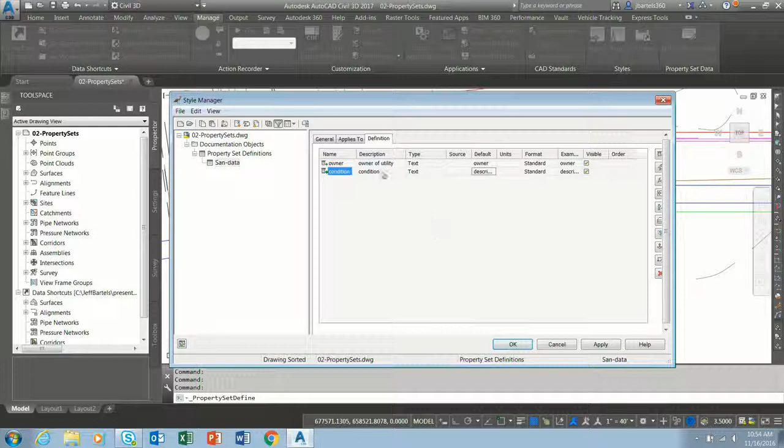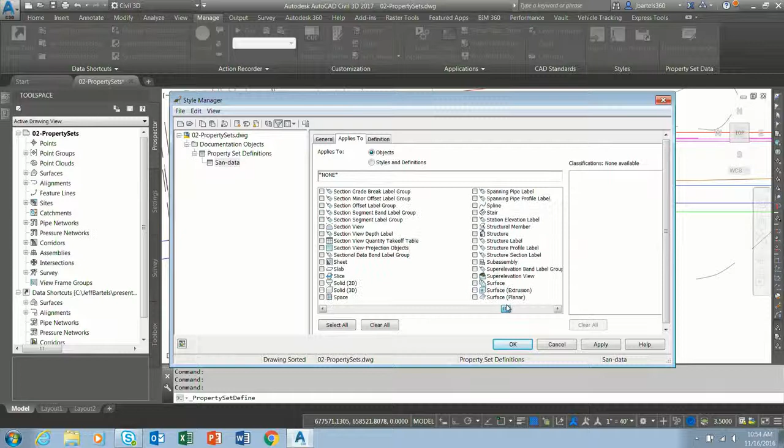Finally, I'll go to Applies To. And here you can see a listing of everything that can exist in the Civil 3D drawing. You can apply property set data to Civil 3D objects. You can assign it to linework, solids, anything. It doesn't have to be Civil 3D entities. Let me slide this over and I'll find structure. That's what this table is associated with. And I'll go ahead and click OK. So now I've made the table.

Let's assign the table to the objects. I'll go ahead and grab a couple of these as a sample, and I'll right-click and say Select Similar. And you can see it's selected all of my sanitary structures. We'll just go over to the Properties palette, go to the Extended Data tab, and then I'll click this little obscure button in the corner that says Add Property Sets. That's why nobody's ever found it in the past. It's that little obscure button in the corner.

And when I pick that, it says, okay, based on what you selected, this is the table or tables that are associated with that object type. So that's the one there. Let me just go ahead and click OK. And that's it. Now if I select this object, I can see that there's the table name, and these are my attributes. So condition, I can say abandoned, owner, City of Elgin.

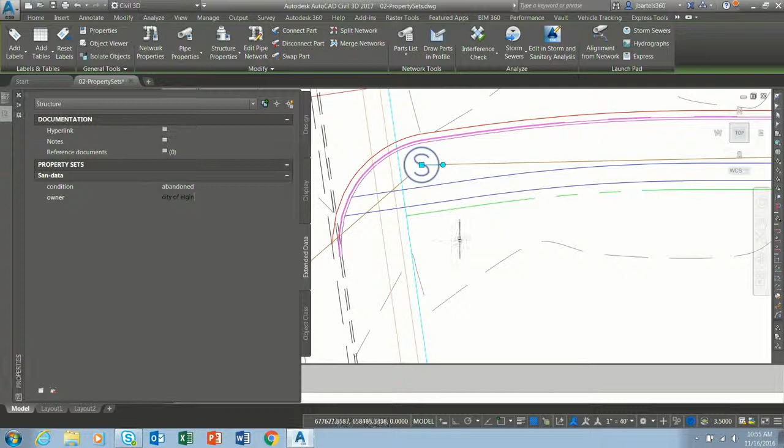Okay. If you wanted to assign attribution to multiple objects, this works kind of like object data if you're a map person, very similar. Let me do a select similar. I could grab all those structures and I could change the owner here to City of Elgin.

All right. The nice thing about this data is, unlike object data, if I pass this to Navisworks, it'll be there. All right. So the data goes with the drawing. If I pass it to the large model viewer in BIM 360 Team, it'll be there as well. So that's where they're going now. This is something that's already in the application that they can leverage to allow you to add your own data that it'll then propagate with the file.

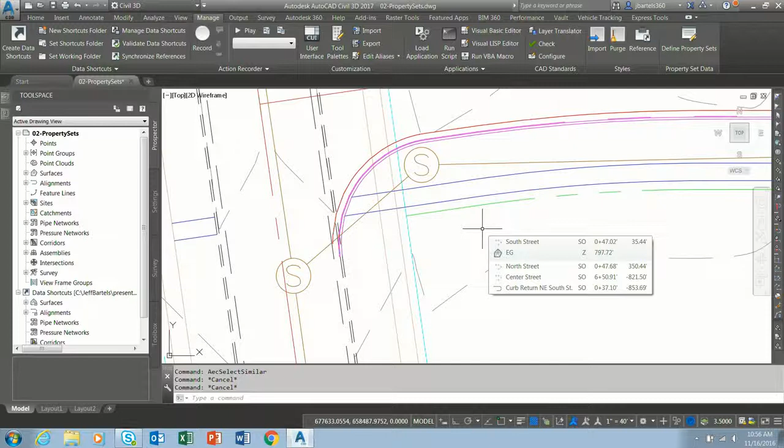Next question comes up, how do I label it? If you're using 16, you can't. All right, not yet. 17 you can. Okay, 17 we can now. The way these are labeled, I'm going to go ahead and put a label on this. Let me go to annotate here, and I'm going to choose pipe network. We'll do single part plan, and for my structure label style, I'll just choose this one called name only sanitary, and then I will select both of these just to use that particular style.

Then we'll pull these out to make them a little easier to see. So that's my name only style. I'd like to add that attribution. If I edit the style, or I could create my own style if I want to, I'm going to just be lazy here and edit this style. I'll just right click and say edit label style.

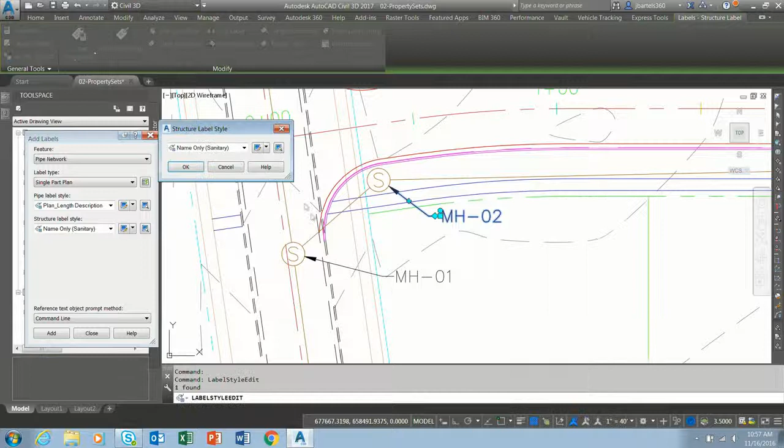In the label style, I have one component that's just called structure text there. On the layout tab here under contents, I can click the field. So this is where I can go through and create my components. Let me go ahead and hit enter. Notice there's a tab here now called property sets. This will display only if you have a property set definition in the drawing that's associated with that object type. So if you don't see it, it's because you don't have a property set associated with that type of object.

All right. Let me go to property sets, and I'll say I want to do owner. I'll just type owner, and then this is where I want to extract the attributes. So I can pull it from the SAN data table. I want to send the owner over. Let me also mention in 2017, this is one of the V1 enhancements. There is a way to label this prior to the V1 enhancements. You just have to write that little code that you see there manually. And I've got a video that'll walk you through that, but I think everybody can get access to the V1 enhancements.

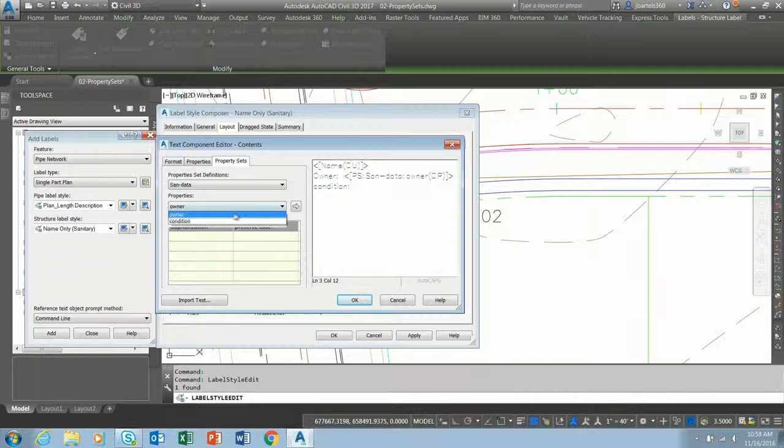Let me go ahead and hit enter here, and then we'll do condition. And we'll grab that property and we'll send that over. Let me click OK, OK, OK. So now those Civil 3D objects are holding my own data. If I were to edit that data, I could come over here and we could make this the Village of Oswego. You can see how that updates. So that is property set data.

Does that carry through to data references? So if you data reference the sanitary network after you did this into another drawing, does it label it as well? Yeah. Question was, would that propagate through if I data reference the pipe network? I'm guessing now. In the interest of full disclosure, I'm guessing. I'm going to say no. Most people would say yes, and then we forget and go home, but I'm going to say no, just because we're associating it to this object. It's not actually in the network. So you might have to data reference it and apply it in that drawing. That would be my recommendation. Unless, of course, it works, in which case, pay no mind to me, okay?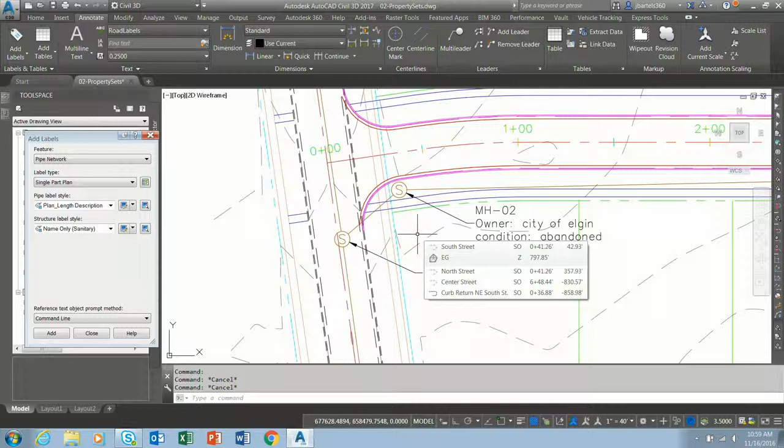So property set data, that's something that you can explore to add the attribution and labels to your objects. Now let me show you something. We've taken this concept a little bit further here. I'm going to jump into a different version of Civil 3D here momentarily. I'm going to show you something that you haven't seen here yet at AU. This code is so new it still has the shrink wrap on it.

In fact, I probably have to be careful saying too much lest the black helicopters will start circling.

But I want to show you something that's brand new that you can experiment with today, should you choose to. I'm going to start by creating a new drawing, and I'll just grab a template here. And let me give it just a little bit of background why this came about.

The Civil 3D development team has been working with a large DOT in the area of survey. There's stuff going on with respect to survey, improvements being made. Can't talk about it. But this DOT approached the development team and said, you know what, we've been using the survey database, we've been using the field books, we've been using all that stuff, and we've got hardware that we like using that does a lot of that stuff already.

We've got hardware when we're out in the field, we can use our own codes, we can connect the line work, and we can see the line work connecting on our field equipment. We can add our attribution, and when we're done, we even want to do our own reduction and everything. We just want to take the line work that we created with our equipment and get that into Civil 3D with our attribution. That's what we want to do. Can you help us do that?

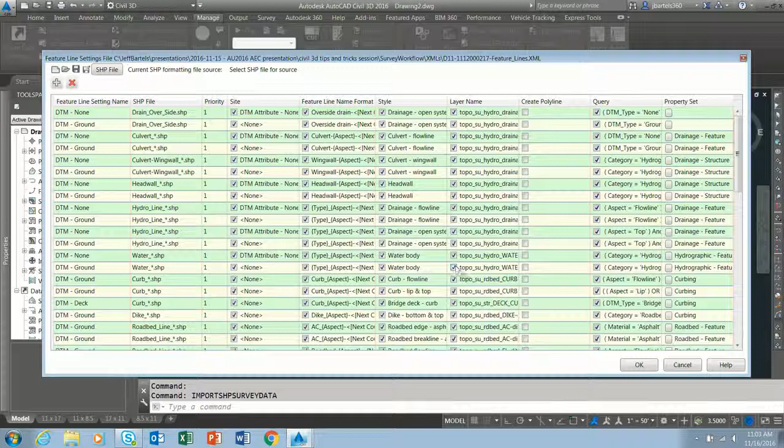I'm just going to call this company standards. Basically what I'm doing here is creating a name for all of the stuff that I can fill out in this dialog box, so that way I could reload it again in the future. Feature line settings. Let me go ahead and click to load one of these. The feature line settings, this is an XML file. If you've ever made a figure prefix database, essentially that's what this is. Let me go ahead and click open. You can see that there. We'll talk about that more in just a little bit.

Point settings. This is like your description keys. Also an XML file. Let me click OK. So I grab both of those, and essentially what this says is when you bring the data in, I want you to match it against these files. If it doesn't match, then you're going to use these settings down below. Let me go ahead and click OK. So I've identified how I want to bring the data in. Now I'm going to identify what I'm going to bring in.

Let me give this an import event. Well, today's Wednesday, right? All my days run together.

Now I can click the Add button and I can select the shapefiles that were collected in the field. The shapefiles that are exported from the collector are going to be an individual shapefile for each class of object, essentially. So we'll have several. You can see there's some sample ones here I'm going to grab. Lines, and we'll do points as well.

There we go. So I've established how I'm going to bring it in, what I'm going to bring it in, then I've got this area over here that establishes where I want to insert this data. Do I want to bring it all in? Do I want to base it on the display? Do I want to bring it in based on a rectangle? I can create a buffer from an alignment. I could maybe 50-foot buffer from an existing alignment and only bring in the data between certain stations. So much more granular control over the data that we bring in now. I'm going to go ahead and click OK, and we'll let that run through.

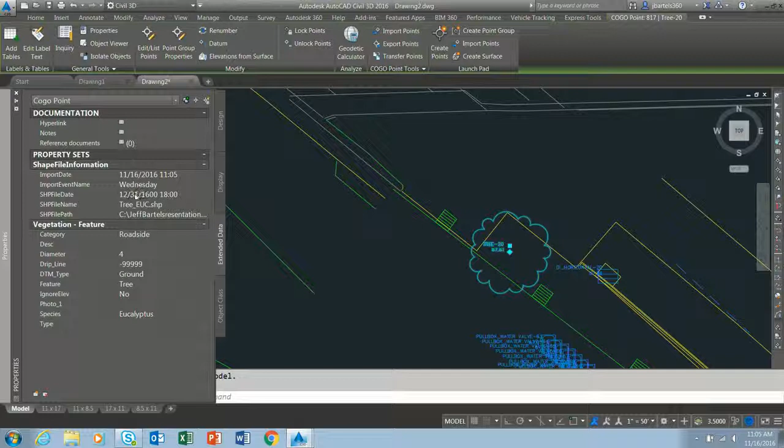So here's that survey data, and I'll zoom in. If I select this tree and come over to Properties, go to Extended Data, you can see it's got a property set table, and this is the data that was collected out in the field. It also has a universal property set, so I can see the date that it was imported, what the event name is, what shapefile it came from, and some of the information around that. If I select this feature line, for instance, and come over to Extended Data, same thing, I've got access to all that attribution.

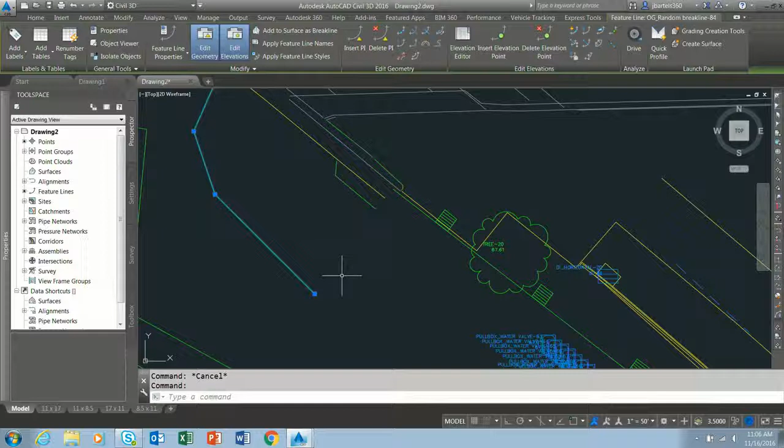Now, currently, I'm using this in 2016. Like I said, this is brand new. There is a version of this available for 2017, so now that unlocks labels too. I could create my drawing, bring it in and label all that survey data if I want to. This is available through the Civil 3D Futures. If you go to beta.autodesk.com and sign up for that, you can download this thing. This is today. You can run this today if you want to. And they're wanting people to experiment with this, give them some additional ideas. They've got other places that they want to go with this. But this is something that's going on to try and alleviate some of the workflow things people have been asking for a while.

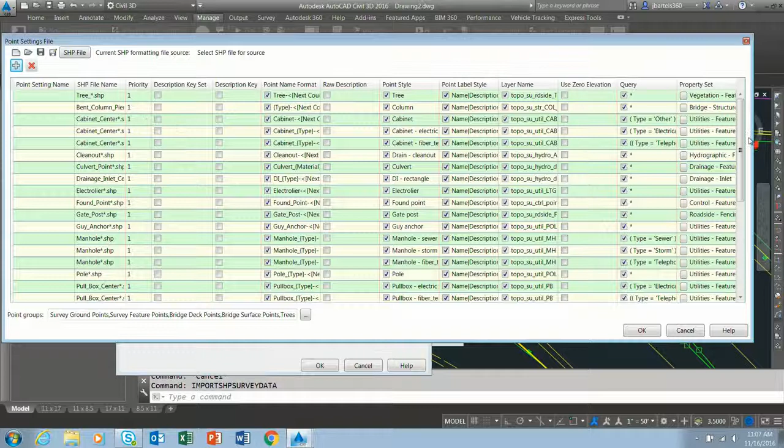Let me do one more thing here. Let me run that command again. Import shape survey data, and I'll open up my settings file here, and then I'll go under points here for a second. Let me just click the edit. Historically, in Civil 3D, when we brought data in from the field, it was stylized based on the description. We don't have to do that anymore. We can now stylize it and label it based on the attribution. So using this workflow here, let me click Add. I'm going to add a row. You can see this is one that was made by the DOT for testing. I'm going to add a row here, and then I'll click in here and choose a shapefile. I'm going to do trees, so I'll just grab one of these tree files. And then I'll explain why I grabbed that in just a second.

Let's do tree EUC *.shp. So when the shapefiles are brought in, essentially what it's saying is when the data comes in, you see that shapefile, I want you to look into it, and I can create a query from that. Any tree that has a diameter less than or equal to a particular value, I want you to put this style on it, this object style and this label style. And we can go through and create complex queries on this now. So we could have one code for fence, and we could use this to say if it's got this attribute, it's chain link. If it's got this attribute, it's wood fence. That's essentially where this is going. That's what this unlocks for you today.

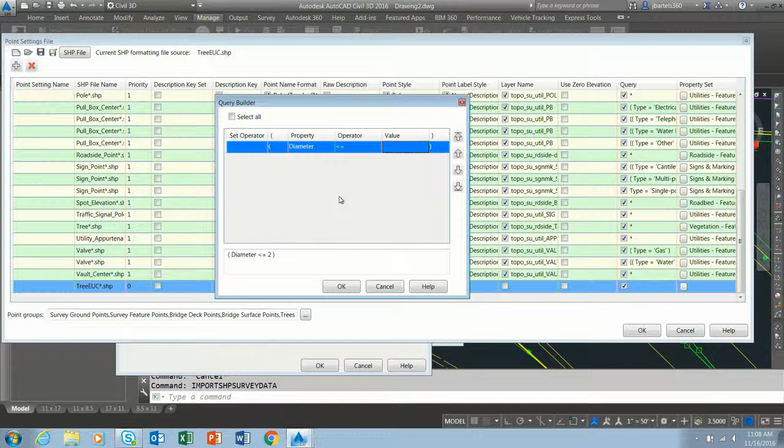What opinion? Thumbs up, thumbs down, take it or leave it. Okay, I'm seeing thumbs. Since nobody can see the audience, we're seeing 700 thumbs in the air right now. Everybody's saying this is good. So even if you're not using it for survey, please download this and give it a shot for your GIS, to be able to bring that in as Civil 3D objects and put labels on them is just fantastic.

I'm going to do one more thing. This is going to qualify as the unnatural act, I suppose, since we have to have at least one of those. Let me jump into my project here. We'll go to XREFs, and I'll go to proposed conditions here.

Oh yeah, I don't want to do that from 16. Yes, yes, understood, understood. Just let it go.

Okay, let's see if we can minimize. Oh, thank you. Oh, all right. It was like one of those lost in space moments. Warning, Will Robinson. Okay.

Fantastic. I'm going to open up a Civil 3D drawing here as soon as I get access to the interface. Sometimes it can be the longest 15 seconds of your life.

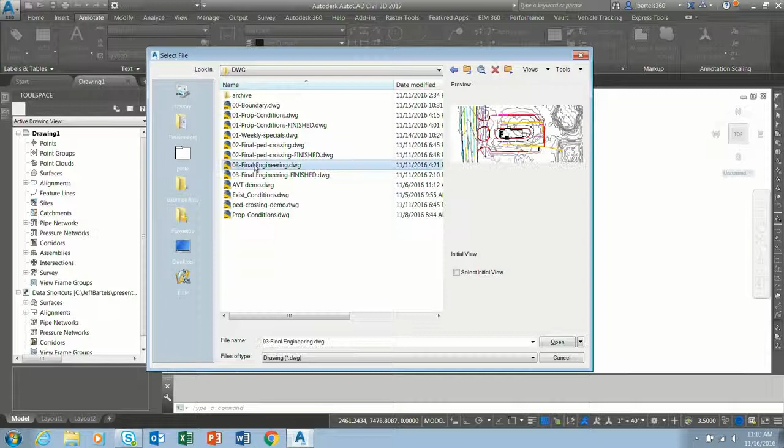Let's go to Civil 3D Projects. Okay, Final Engineering, we'll go with this. All of that just to show you that okay, so that is my proposed site plan.

This was built in Civil 3D. We touched on this a little bit ago. I've got my three-dimensional grading, I've got my utilities in there. Maybe I've gone through and finalized my site. So all of this was built in Civil 3D.

I would like to create a VR, virtual reality experience from this. They've talked about VR a lot here at AU this session. Now when you first think of VR, you may think time-consuming, steep learning curve, and quite possibly expensive. We can take and create a virtual reality experience from a Civil 3D drawing with virtually no learning curve, and we could do it with our smartphone.

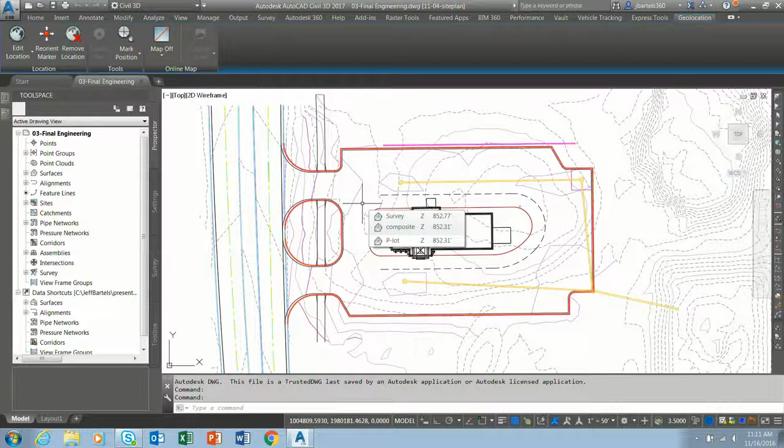And we can take, if we have a Google Cardboard or some other device, let me show you how we can do it. Like I said, unnatural act - we're just going to move this data through a couple of different applications.

I'm going to jump into InfraWorks here for a minute. So I took that Civil 3D data, created a land XML file, and moved that surface over. I created some boundaries from my daylight, moved that over as a coverage. I created a boundary for my parking lot, moved that over as a coverage, and colorized these things. Then I added some accoutrements to create my proposed site plan.

And we talked about this earlier, the chicken and waffle site - I like to think of it as a retirement opportunity or an investment if anybody wants in. So this is that site in InfraWorks.

So to create my virtual reality experience, I'm just going to export this. I'll come up here and say Export 3D Model, and I'll export that using a bounding box. Let me go ahead and double click here, and then where do I want to save this? I'm exporting as an FBX file, and that boundary represents how much of that do I want in my virtual reality world here.

Let's go to the C drive here, and you see I saved one from yesterday there. We'll just overwrite this other one. So I just window that model, export as FBX. I'm going to export the materials, and merge the objects with the same textures. Let me just click export and we'll replace that previous one. So that takes just a second to process.

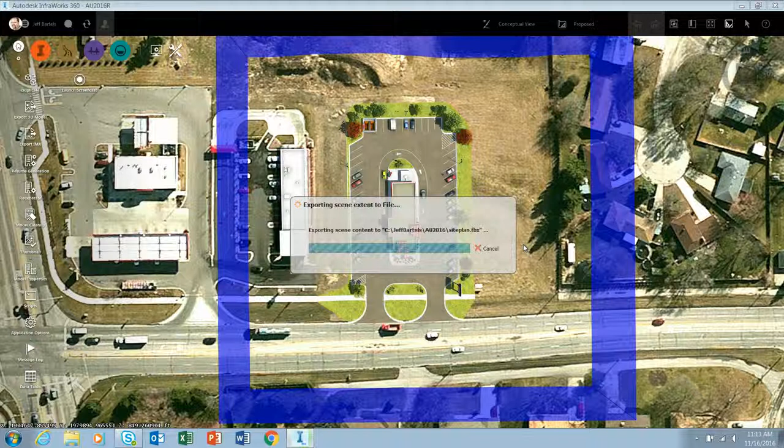So that's step one of the VR experience. That's done, let me jump out of this. Now I'm going to jump into Navisworks. Navisworks does a lot of fantastic things. What we're going to use it for is just creating a stereo panorama. There is an option that we can do some cloud-based rendering. So let me open Navisworks.

And I am going to open that site plan file. And when this comes up, since it was exported with the materials, all the materials will be there - it's going to be the same as we started with. Now it does come in with a wee bit of a tilt to it there.

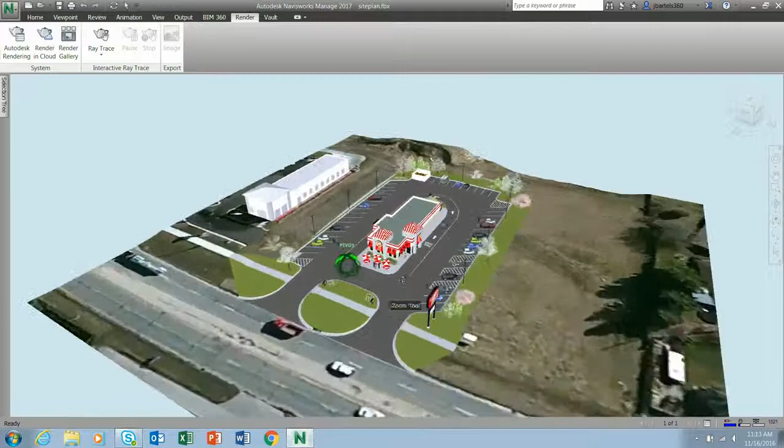Let me just orbit this around. Okay, so I can position myself where I'd like to be in the virtual reality environment. And step three, just come up and click Render in Cloud. I'll choose Render in Cloud. I want to render the current view, and I want to render it as a stereo panorama.

And then you can see no cloud credits for that if I go with the basic settings. If I want to bump this up to final, advanced, and the largest pixels, it's going to render in the cloud. I can say email me when it's complete, and I can click Start Rendering.

Now I've already rendered one of these. Let me go to the render gallery, and I'll click Sign In here. We'll sign in with my credentials.

And here's the chicken and waffles site here. Let me show the renderings that I've created. So here's one. If I hover over that, you can see 15 minutes it took to render that. If I select this, it will open it up and show a 360-degree panorama. Notice that it has a QR code in the corner.

So if we were at a public meeting, we were trying to get support for this, I could take and show this 360 panorama, but with that QR code, I can pop up my QR reader, and I can scan that. And when I scan it, everybody in the room can see my phone.

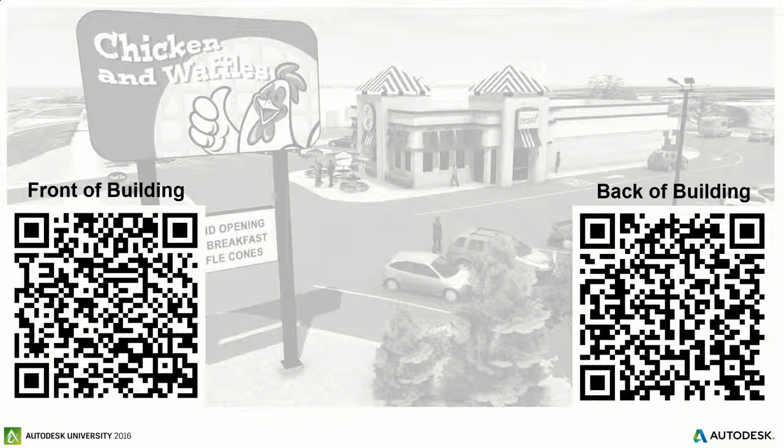It just comes up on your phone, and all you got to do is turn your phone into landscape mode, and then you've got the stereo pair, and you could put that in a Google Cardboard, or if you want to pay about $3 more, you can get one of these ViewMaster VRs. It's like 17 bucks to do virtual reality. And everybody's used a ViewMaster, right?

No learning curve. Like to say, ViewMaster's been doing VR for 50 years. So I wish I could pass it around to everybody, but just let a couple people. This is the benefit of sitting in the front if you want to look in there. But that will give you a 3D perspective. It's like you're standing in the model. You can see it in 3D. You can take and look around.

You can't walk around. You probably don't want to do that anyway because your reality is different than the model. Oh, that's right. There's a little lever, just like the old ViewMaster. There is a lever in there.

Now, since it is a cell phone, the phone will want to go to sleep. So it's a real high-tech thing. When you pull the lever down, a little rubber finger comes out and just touches the glass so it doesn't go to sleep on you, okay? So you can do very, very quick, virtual reality, very inexpensive. And you could print that QR code in the newspaper.